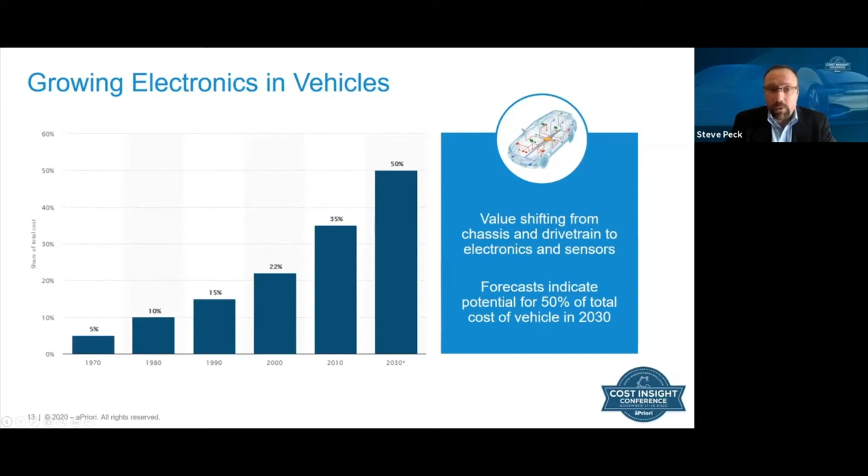What we're actually seeing is that the value in the vehicle will be shifting from the chassis and drivetrain to the electronics and sensors, to the point where estimates have it at 50% of the value of the vehicle being in electronics as we move in over the next decade here. So what are some of the challenges that this will bring?

So in terms of the electrical content, we're really focusing on your printed circuit board assemblies and your wire harnesses that are connecting the vehicle. And it's often seen as a black box. Limited visibility into the costs associated with those, and the processes in terms of working with suppliers are by no means optimized. The components themselves are a significant cost contributor.

They're constantly changing. You have issues with life cycles. You have variability in terms of cost based on demand, and information that's typically stored in a variety of places, if managed at all. And when we look at costs, there's an issue in terms of understanding the entire vehicle and the electromechanical aspects of that.

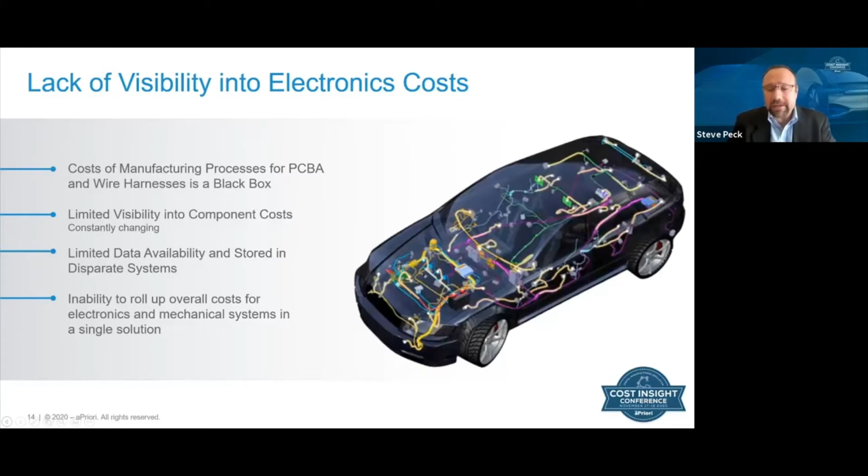So being able to understand the costs of, we've been talking over the past 2 days here with all the capabilities to simulate your mechanical processes. Well, for completeness, you really need to be able to consider the electrical components as well, and take that into consideration to really have a full roll-up.

So with aPriori, in terms of electronics cost management, we have a very robust solution for costing PCBAs and wire harnesses that allow for very quick analysis, consistency across the different teams or users that'll be analyzing them, and providing the details in terms of the components themselves, as well as the transformation costs in the build process.

And really, by digitizing the process, it's helping to enable engineering to make early decisions prior to going out and quoting and having insight to be able to respond quicker to their customers. The contract manufacturers to be able to respond very quickly and consistently to quotes and ensure that they're hitting their target margins.

And for the OEs to really form more strategic relationships with suppliers, that transparency that Daniel just spoke about in terms of the Harman presentation, where it's critical that you're able to work closely with your suppliers, but also ensure that it's a win-win on both sides, and that you're able to negotiate and make sure everybody is aligned.

With this solution, we saw in a session earlier today where Stephanie Mills covered our solution in depth and covered demonstrations. We're powered and partnered with SiliconExpert, which allows us to consolidate and get accurate real-time cost information and physical property information on the components that ultimately drive and help that roll-up of the cost be pulled together and consistent across all users.

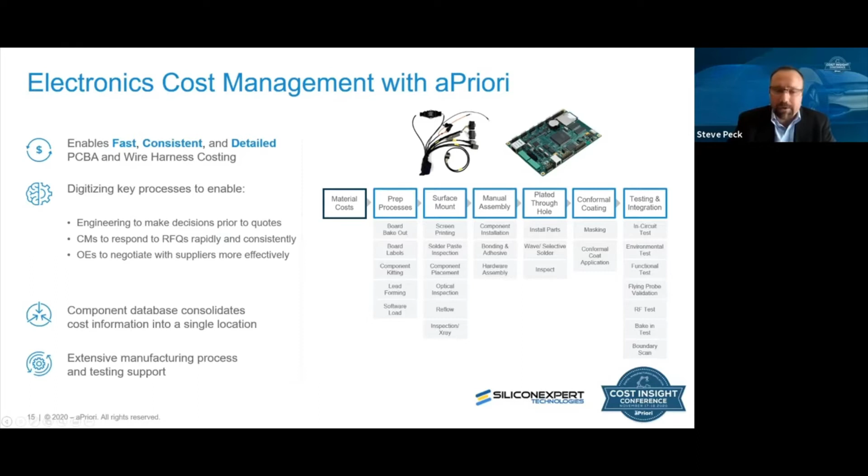And that gets coupled with comprehensive manufacturing process coverage, from initial prep processes all the way through testing and integration of your printed circuit board assemblies and your wire harnesses. So just to touch upon electrification and some of the key aspects of the solution, if you wanted to go back and look at the recording, that would be very helpful for you.

So let's talk a little bit about lightweighting. So it was interesting in the video we saw with the 67 Fastback from Charge Cars, there was a mention of pulling several hundred kilos out of the car by using carbon fiber panels for the deck lid, the hood, and the fenders on that vehicle to do a couple of things: enhance performance, potentially extend range.

With electric vehicles, pulling weight out of it is a way to get additional miles or kilometers out of the vehicle. And it applies as well to your internal combustion engines, where you get increased fuel economy. And of course, the performance benefits in terms of acceleration.

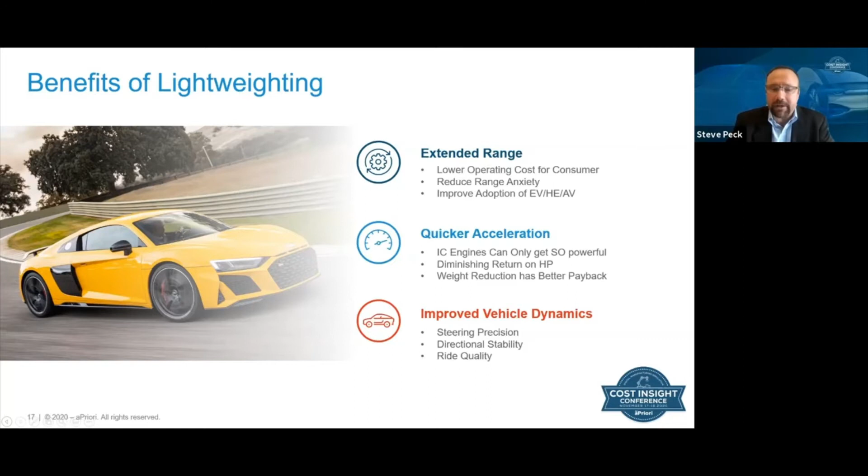With internal combustion engines, you can only get so much out of horsepower, and you get a better payback potentially by pulling weight out of the vehicle, and the performance characteristics and handling can all be enhanced. So certainly some benefits there. So what are some of the approaches to lightweighting? So a few key things to do is potentially look at alternate materials or alternate processes.

We look at a vehicle like the Ford F-150, when that went all aluminum, it really drove a lot of changes and some uncertainty about those changes in materials. An alternate way is to look at the process. So we see more and more activity in the area of additive. We have processes around composites, looking at multi-component sheet metal assemblies, and potentially that could be a casting, for example. So various ways of looking at different processes to help with overall part quality, pulling weight out of the part, and also potentially driving some cost out of the vehicle.

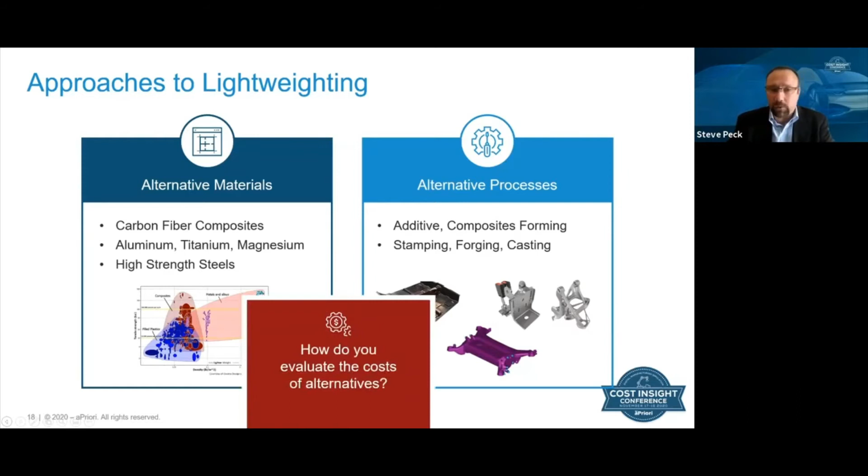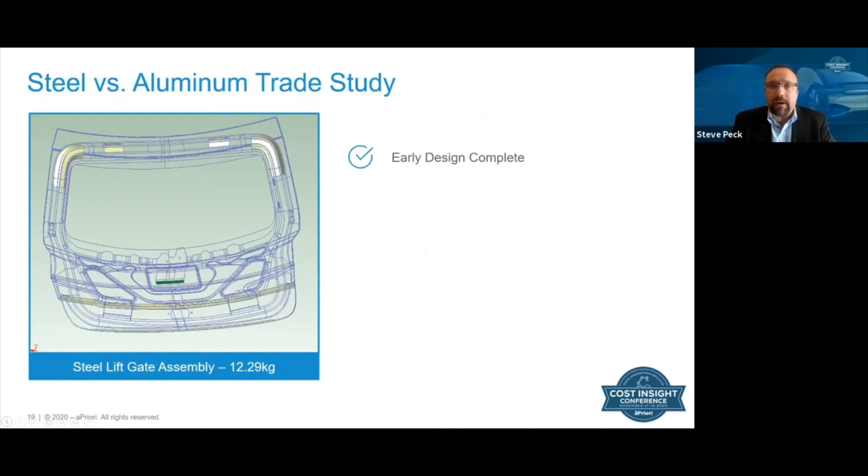The question is, how do you evaluate the costs of all these alternatives? So let's take a look at an example here of a liftgate assembly. This is an assembly that early design has been completed on, and there was a request that came through from the Dynamics group looking to pull 3 kilograms out of this assembly. Well, one way to start to think about this is possibly changing the material. Instead of a steel liftgate, potentially it could be changed to aluminum.

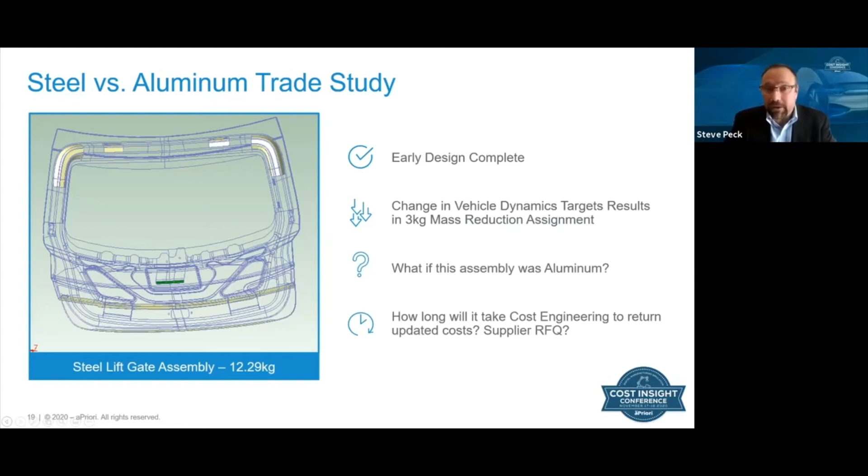Well, how long would that take the cost engineering group to go through that analysis and return the updated costs? And what if there was a supplier involved and you had to go through the RFQ process to really understand how much it's going to cost you potentially to drive those 3 kilograms out of the design? Well, with aPriori, we went through the analysis. Of course, the CAD work has to be done. The gauge of the aluminum was thickened up. There were assembly process changes to move away from a MIG welding process to some adhesives.

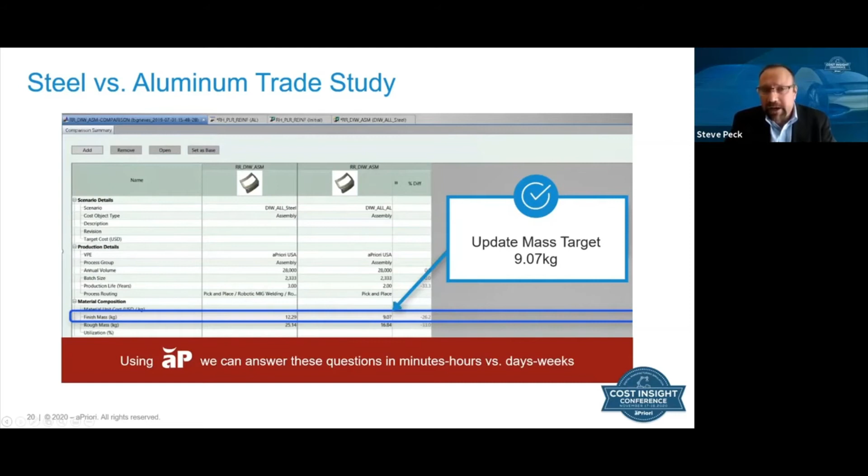And this was analyzed, and we can quickly see that we've gone from 12.29 kilograms down to 9.07. So we actually hit the mass target, and we can see what that's going to cost us. And actually, there was a cost associated with that, but we were able to go through that analysis in a matter of minutes or hours versus days and weeks. So to be able to help provide informed decisions, you can leverage the capabilities here for doing that.

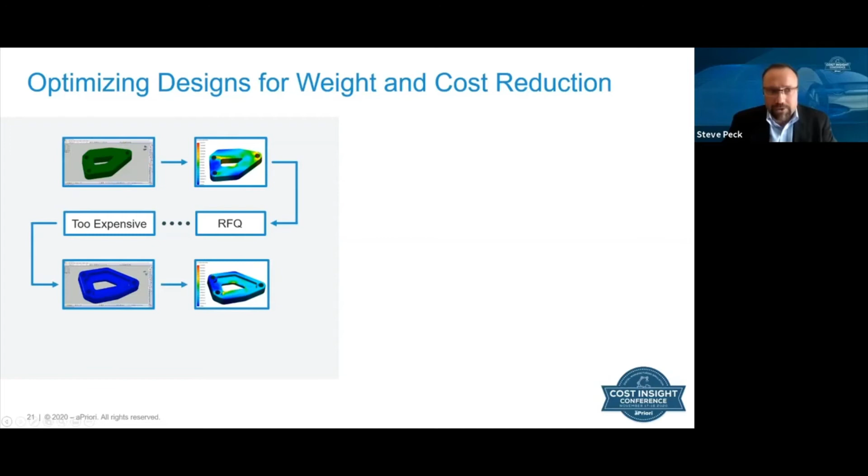Another way, let's look at an example here of an individual component that is ready to be released, goes through stress analysis with successful results coming back through, and then it goes out for RFQ. And there's this time spent waiting, only to find out that it's come back and the price is just unacceptable. It's way too expensive. So redesign activities occur. So geometry is modified, removed some material, reanalyzed in CAE to make sure that it structurally is still sound, and then back through the RFQ process and waiting again.

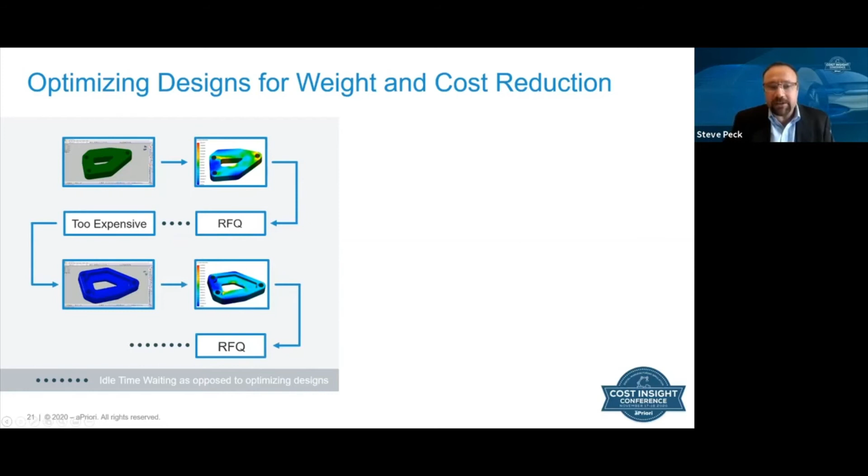So all that time waiting is really not helping in terms of getting to an optimized design. So what if you could use that time to get through another iteration? The problem is that with the compressed time to market and the chart that Craig showed earlier on, where your development cycles have compressed, time is really of the essence. And you need to be able to work under those pressures. Waiting on supplier feedback and RFQs, that's just another bottleneck in the process.

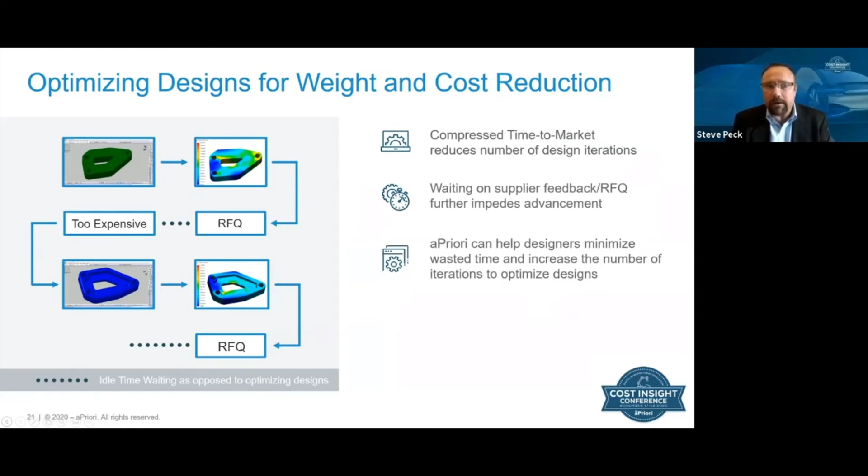So with aPriori, we can quickly go through that analysis. Designers can use that extra time instead of waiting on RFQ responses only to find out that it's too expensive. Several weeks can be wasted, where that time could have been spent further optimizing the design, driving out weight and cost from the design. So in this case here, there was an additional weight reduction as well as a cost reduction by getting that extra cycle in.

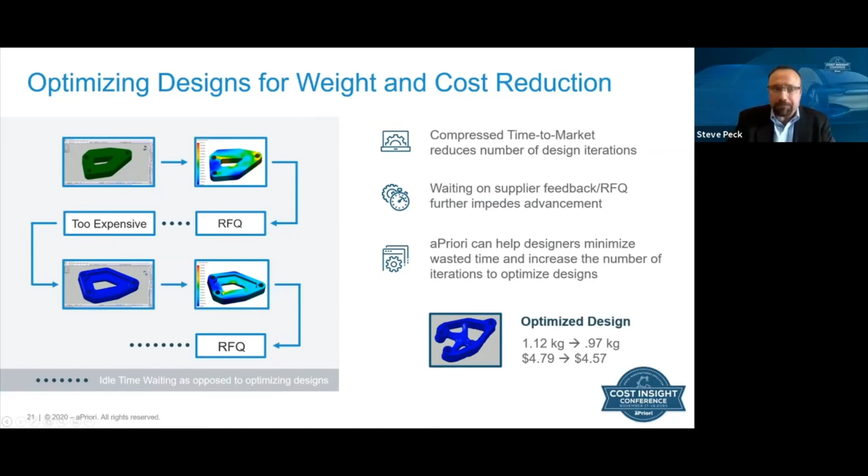So continuing on that theme of compressed schedules and really how processes can potentially evolve to take advantage of digital threads and the capabilities that a digital solution can provide. There's opportunities for sure in terms of market share. We see, as Craig put up, with all of the new vehicle entrants coming in, getting to market first gives you a big competitive advantage. However, you still need to be able to make sure that you're hitting profitability targets. Looking at the new technologies and exploiting them, we looked at materials and processes.

There's uncertainty and risk associated with them. So how do you provide the insights to really understand that manufacturing process and the costs associated with it so that you can get the most out of those new technologies that you're adopting?

And going back again to working with the supply chain, looking at, is this going to be made internally or is it going to be outsourced? And establishing those partnerships with transparency with your suppliers, just exactly what Daniel was talking about with the Harman use case, and how you can have transparency to make it a win-win on both sides.

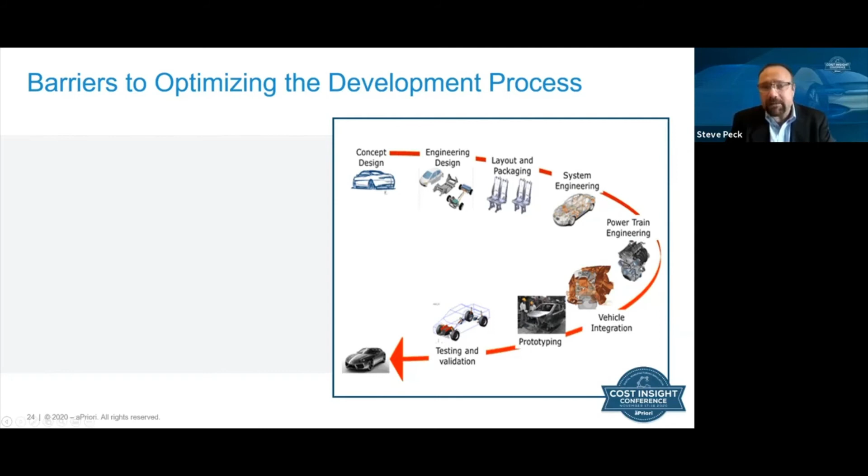So what are the barriers to optimizing this development process from the earliest stages of concept design to getting the vehicle out and delivered to the end user? Well, one bottleneck that we see is inefficient design collaboration. There's a lot of people and a lot of groups within the organization involved, and even extending out to the suppliers. Lots of iteration and back and forth that there's opportunity to improve.

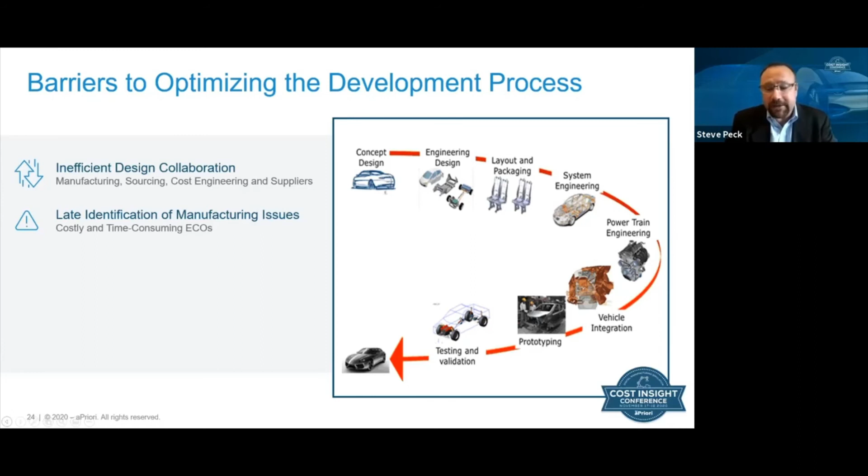Manufacturing issues, having those come up after the fact and trying to scramble to not only process very costly ECOs, where in some cases $5,000 for an ECO is not unheard of by any means, but in such a compressed time frame, you're not at liberty to deal with issues that come up and just extend the process. So being able to address ECOs early on and make sure that you're hitting cost targets.

The time to go back and perform VAVE activities is limited in order to maximize productivity in such a compressed schedule. And make sure that those supplier relationships, the struggles that are there in terms of the lack of transparency, and in many cases, we see that quote packages go out to suppliers that are not well suited for them, are not necessarily going to even potentially be bid on or bid completely on, and it puts undue stress on the suppliers having to respond to those.

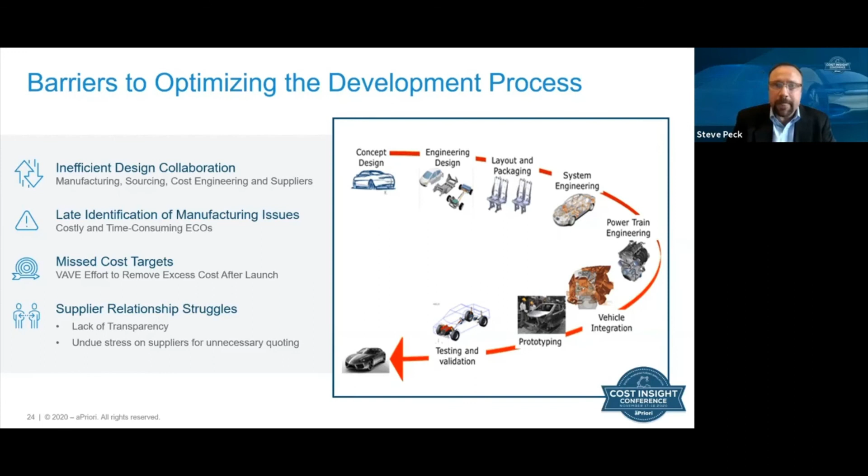So if we look at what we can do about this whole thing and really transform the process, it's looking at the digital twin and what could you do if you could leverage the digital twin to analyze parts for cost and manufacturability very early on upon design and check into your PLM system. Look at the parts and identify the issues on those parts from a design to cost and a design for manufacturability standpoint so that you have insight into where you stand from a target cost,

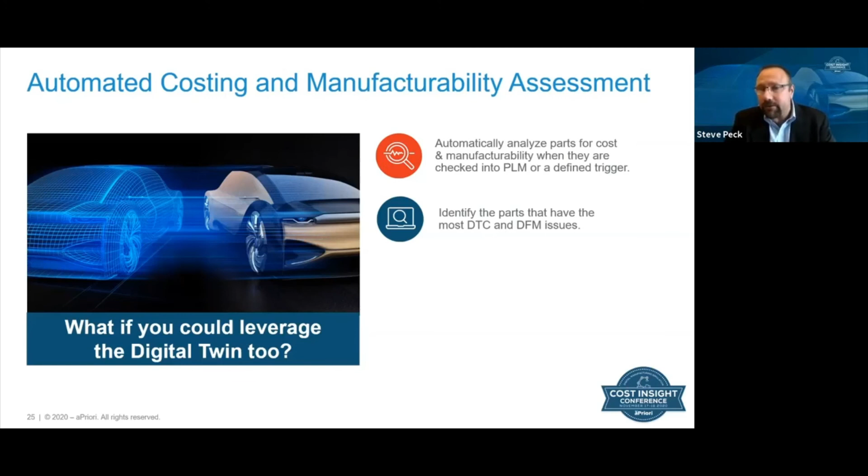and that those manufacturability issues that are driving cost or are going to result in an ECO can be identified early on, being able to highlight those features in the cost drivers and provide some guidance for how to fix them so that the designer can go in, work on just the parts that need to be addressed and make those changes in CAD and make the updates, and then get the right information to the right people at the right time.

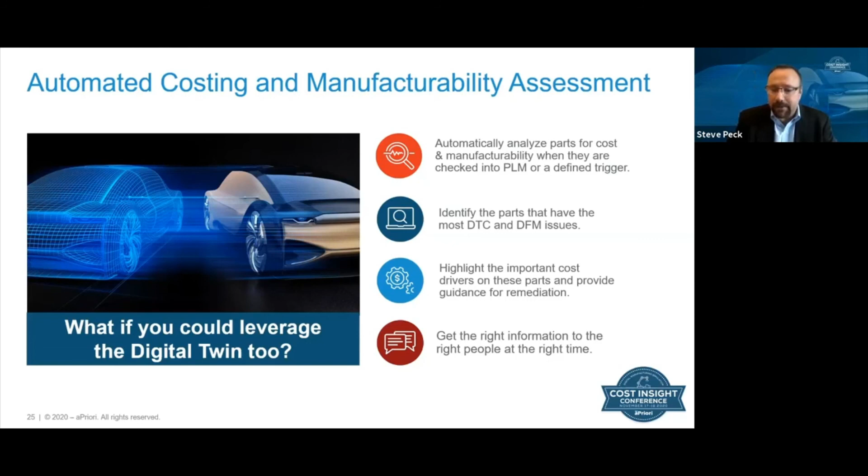So consumers in manufacturing, in sourcing, cost engineering, and even the supply base having the right information to really help accelerate the process, eliminate the bottlenecks related to communication, and provide the right information to take the right decisions to optimize the vehicle.

So our solution, we've seen this in different presentations throughout the course of the couple of days, and really lots of traction, and really being able to drive adoption in engineering to provide that cost and visibility is really enabled by our Cost Insight Generate solution that allows the design engineer to check models into PLM, have the cost and manufacturability analysis happen in the background, information passed back to the main repository in PLM.

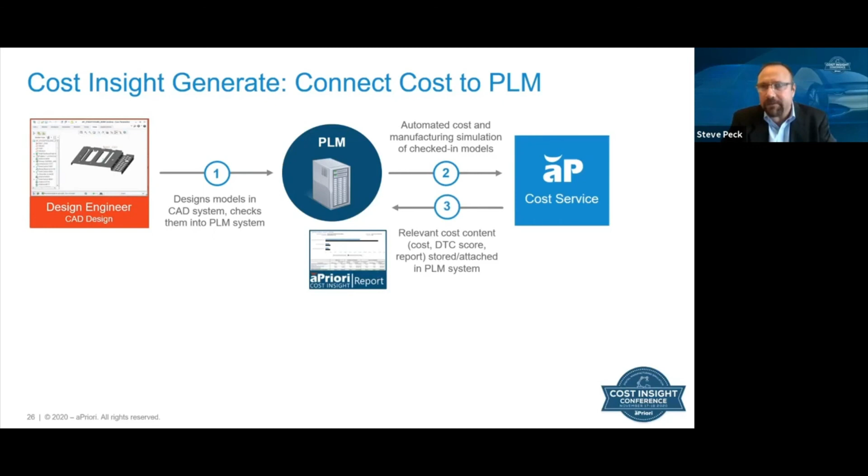So your cost information, manufacturability scores, and then get that information to the design engineer so that they can go address the parts in question, work interactively with the CAD system, and focus on what's important.

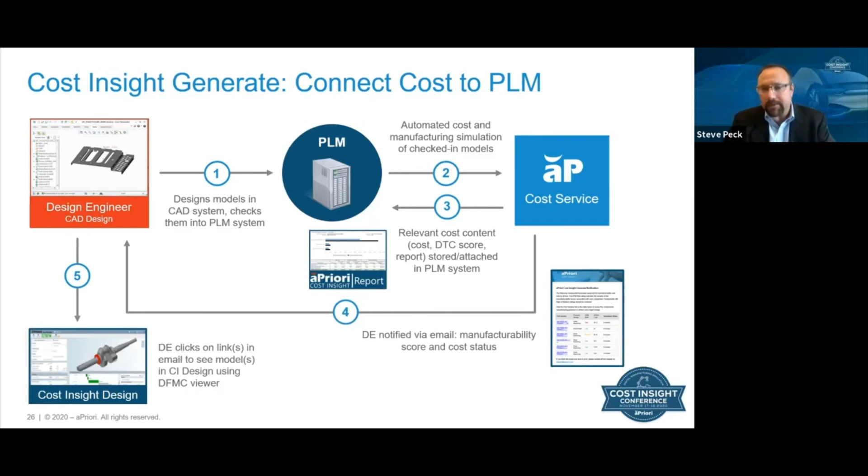And with all of that said, with the challenges of electrification, lightweighting, the need to address the compressing schedule, it's really all about embracing the digital thread and digital manufacturing to adapt to these changes. So making sure that you can meet those aggressive schedules with a digitally transformed development process, achieving target costs,

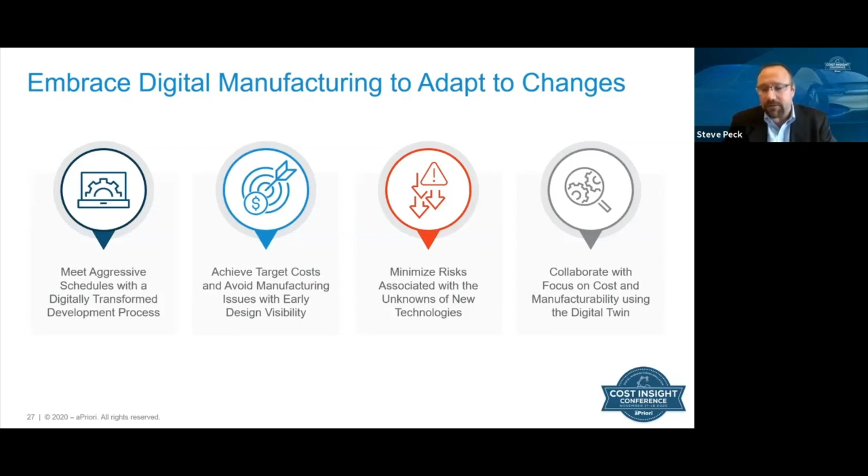avoiding manufacturability issues early, minimizing the risks associated with those unknowns, and finally, enabling the collaboration across the enterprise, leveraging the digital twin. So that's what we see as the ultimate way to really change the way that vehicles are developed today, to really take advantage of the digitalization, to bring more insight early on in the process.